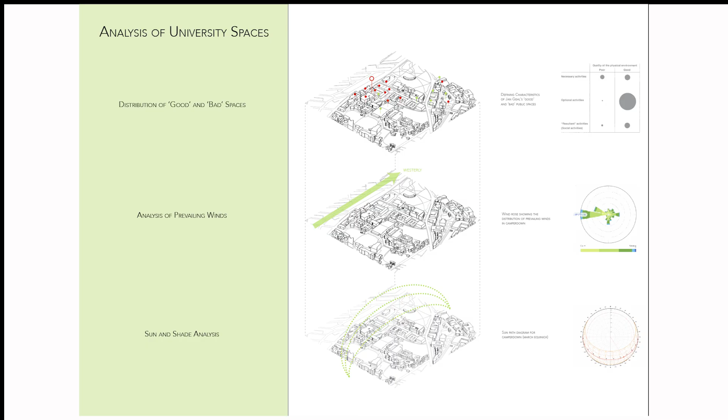In response to the words of Jan Gehl, we undertook a broad analysis of the university's public spaces. We found that there is an overprovision of transitional spaces, particularly in the heart of the university. Transitional spaces do not accommodate for inhabitation and hence leave said spaces void of interaction. We also did some broader research into the site, looking at prevailing winds and the path of the sun at various key dates, such as both solstices and the equinoxes.

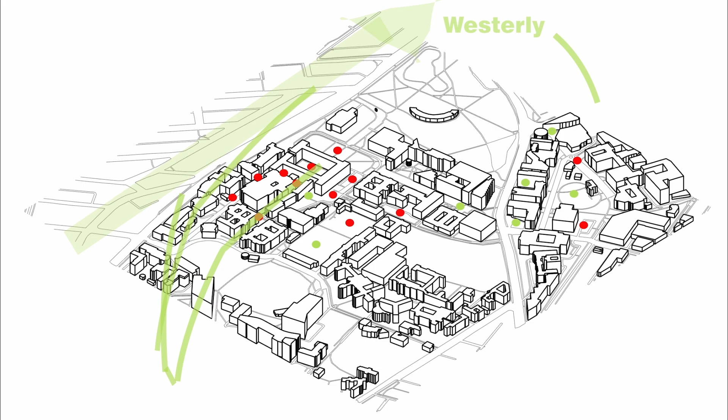Following the broader site analysis, we chose to focus on the solutions for a single space that could be then used as a case study for others within the university. Our site was chosen based on its highly transitional properties. This can be seen through our heat map showing auditory patterns associated with the movement of individuals.

We also reviewed the various demographics that are most likely to use the space, as well as the provision of seating in close proximity to the space.

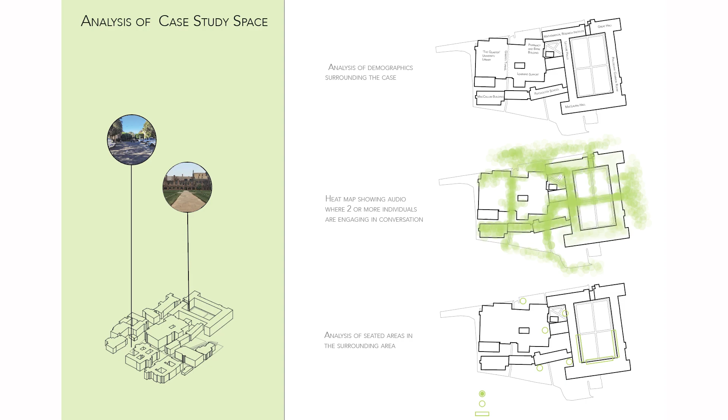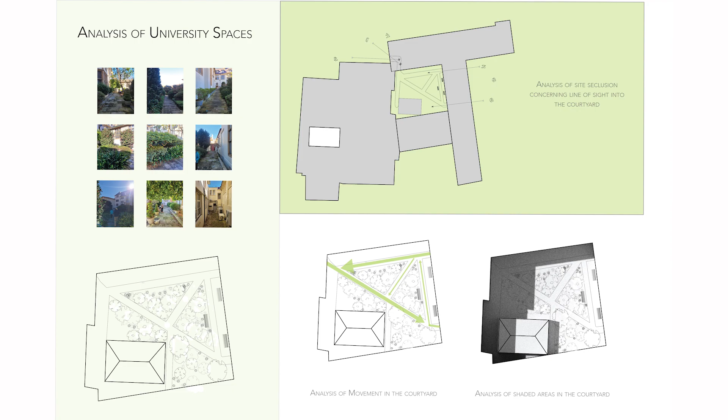Our site primarily acts as a liminal zone between the Science Alley and Quadrangle. It offers 3 primary paths connecting the 2 spaces. These paths break through a beautifully designed garden with little to no seating or areas to pause and briefly inhabit the surrounding scenery. Through initial observation, we concluded that this site had large potential to become a zone of optional activities, allowing social interactions and moments of pause in what is now just a transitional space.

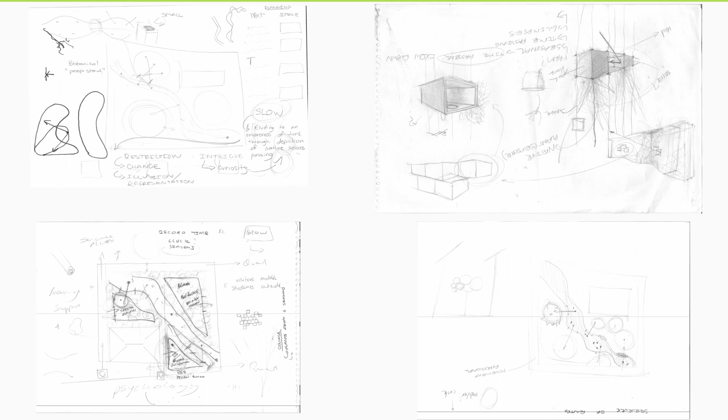We hence came to the conclusion from our research that individuals currently using the space are often too fixated, stressed, or in a rush to stop, inhabit, and enjoy. We thought it would be most relevant, as such, to create pause moments in order to get people to slow down and contemplate inhabiting these spaces, which they would usually move through almost unaware of their surroundings, fully unappreciating said spaces.

We then thought about ways in which we could slow down the movement of transitional spaces while making the spaces themselves more accommodating for inhabitation. Given the demographic of the site being predominantly university students, we thought it would be most effective to create pause moments through a spark of curiosity that creates a sense of intrigue, encouraging individuals to contemplate inhabiting the space.

We aim to achieve this curiosity in 3 distinct ways: through change, restriction, and illusion, all used in the storytelling of the 6 native First Nations seasons. Seasonality is introduced as a way of alluding to the time passing in a further attempt to slow the movement down in the space and get people to pause.

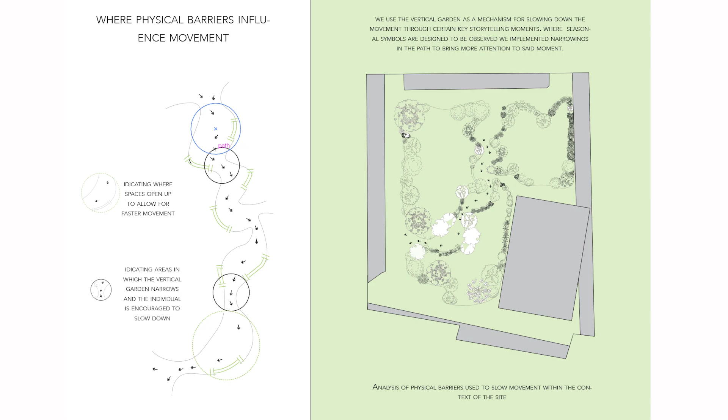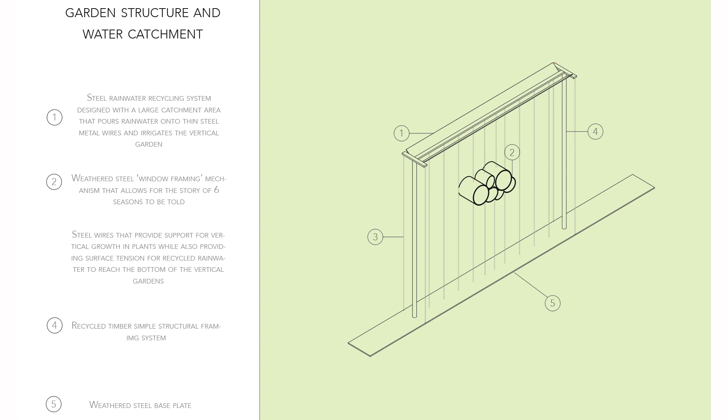Our method of storytelling takes the form of small moments realized through the framing of key First Nations seasonal symbols. We designed the layout of the park to suit the format of storytelling, creating a single path that brings people on a journey through the seasons, using physical barriers to slow and better communicate First Nations values. Simultaneously, we maintain the efficiency of the space through the implementation of a transitional zone around the perimeter of the garden.

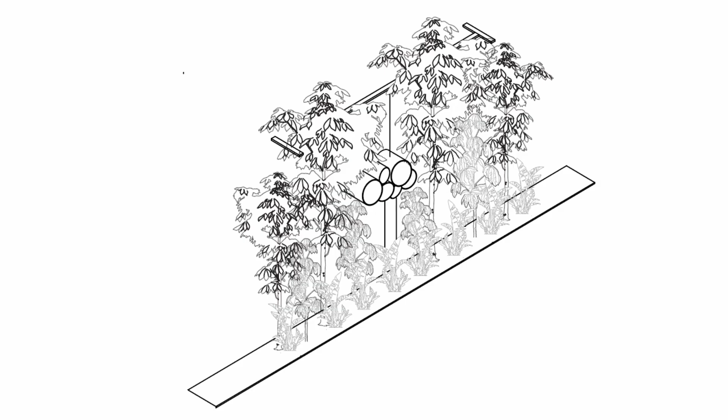Given the concept of our project being so closely tied to First Nations land and people, we thought it would be fitting to work within the Wingara design principles. This is expressed through the representation of First Nations seasonal values, however primarily through our choice of materiality, regarding elements such as rusted metals, sandstone pathways, and timber seating.

Along our primary path, we decided to include mirrors into our framing mechanisms, warping the depiction of seasonal iconography as you enter the path. These mirrors not only strike initial intrigue and curiosity, but also urge visitors to indirectly engage with and witness the seasonal phenomena existing within the garden spaces.

In relation to Jan Gehl's framework, we have offered and designed a blueprint converting a transitional space into what Gehl outlines as a good public space. Through enticing curiosity and offering optional activities, we have allowed this liminal space to become a site of social inhabitants and cultural value.